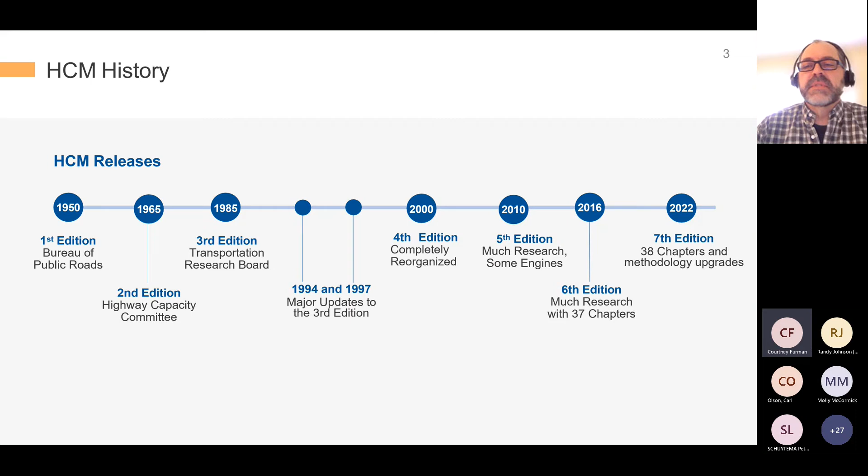Just a note on the timeline, the 2010 edition was the big implementation of multimodal level of service or quality of service metrics. With the seventh edition, you'll see today a number of new updates, including a new chapter on network analysis. A little background: all of these updated HCMs have a large number of research projects that feed the development of the technical material, as you'll see in our slides today.

One is based on pedestrians, also of course the CAV, FHWA pooled fund study, heavily led by Oregon DOT, and you'll see Peter's presentation that also addresses that after mine. There's some updates to the two-lane method, as well as the new network analysis, chapter 38, and of course various updates throughout.

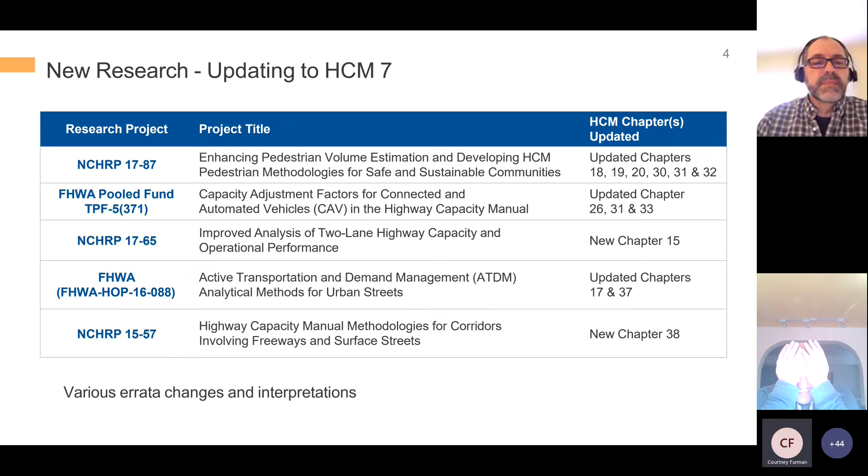So just some updates on pedestrians. We always, as a committee, like to use a time like this to remind people that the Highway Capacity Manual has a lot of non-highway modes included in it, including bicycles and pedestrians. There's been many ways to analyze and develop metrics for non-motorized modes, and it continues to get better over time.

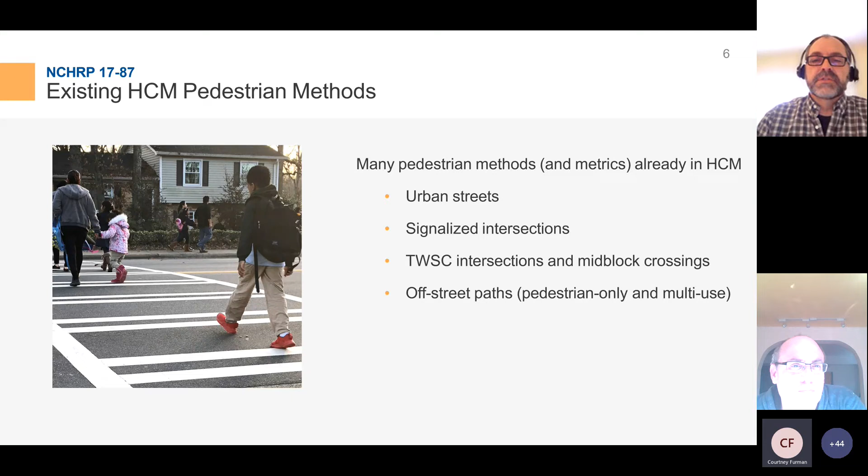Urban streets, signalized intersections, two-way stops and mid-block crossings, and off-street paths, for instance, are existing methods for doing pedestrian analyses. The next series of slides will have the sixth edition on the left, with the new HCM seventh edition modifications on the right.

For uncontrolled crossings, two-way stops, and mid-block crossings, there's been some modifications in terms of level of service being based more on a percentage of dissatisfied or satisfied pedestrians, and being more sensitive to a variety of parameters, including an updated set of motorist yielding rate tables that are very informative and interesting to look at. So with different pedestrian treatments, what type of motorist yielding rate you could expect based on that—that's a very useful table to draw upon as you're looking at project implementations and alternatives.

Delay is still calculated and sensitive to design pedestrian speed, and I'm going to minimize this so you guys don't see the time. Sorry.

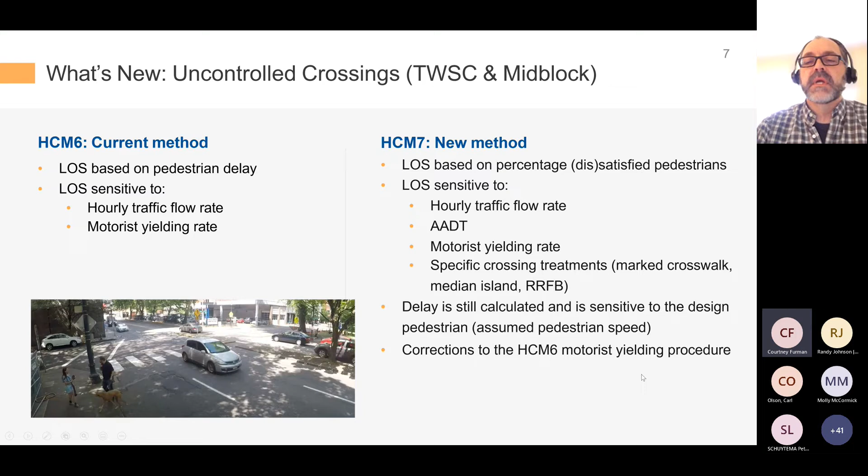If we look at signalized intersections, we've been able to do a variety of metrics for pedestrians over time, including delays and other density-based calculations, circulation areas, and so forth.

But that's been expanded with the HCM 7th edition. There's definitely more there, including talking about the all-ped Barnes dance, or ped scramble, and a variety of other crossing alternatives that you'll see there.

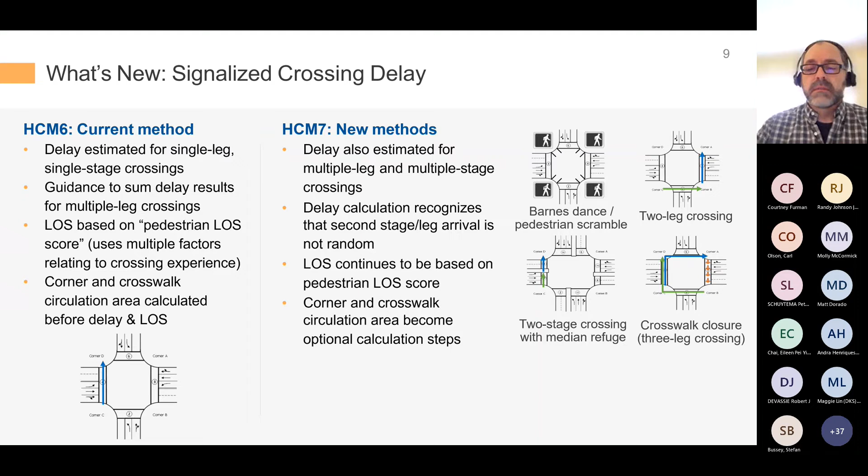The flow of the way the steps are listed out now breaks apart the delay-based versus the corner and crosswalk circulation-based calculations, because it was kind of misleading before—it made it seem like you had to do the corner and crosswalk circulation areas in order to get to the further steps that included the delay or the multimodal quality of service calculations, which is really what the level of service grade is based on. But now those are broken apart separately and are much more clear in terms of how you might want to analyze pedestrians at signalized intersections.

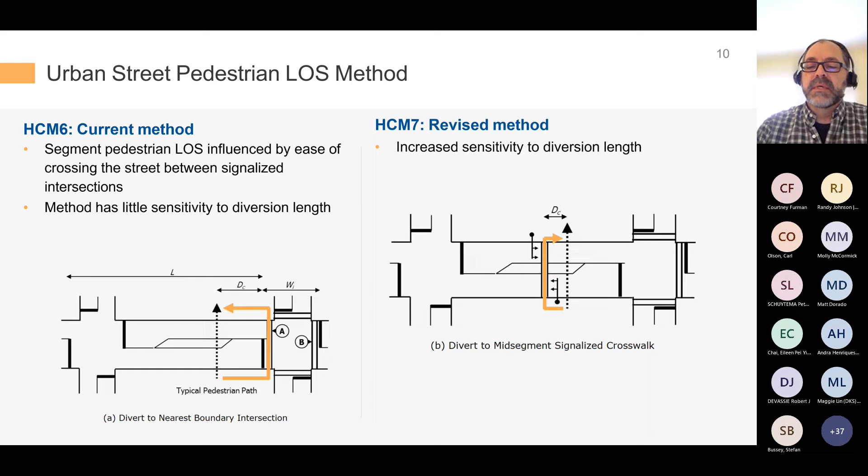When it comes to pedestrians along urban street corridors, the revised method is more sensitive to diversion. Previously it didn't quite account as sensitively to the fact that people really don't like to have to walk half a block to a signal and then cross and then walk back, and hence why we see people crossing mid-block even when there's not a striped crosswalk to do so. There's some increased sensitivity to that, so the method is improved in that matter as well.

So just keep that in mind.

New methods for PEDs have always been there for quite a while, as well as bike methods—a lot in the Highway Capacity Manual, not related to the word highways in quotes.

In terms of connected and automated vehicles, I know Brian at ODOT, who's also a committee member and subcommittee chair, Brian Dunn, and others, of course, were in these places from the public agency perspective of all this talk about CAVs and having these long range planning projects where they would need to start making some type of accounting for how CAVs might change the actual operations from a planning perspective, at least.

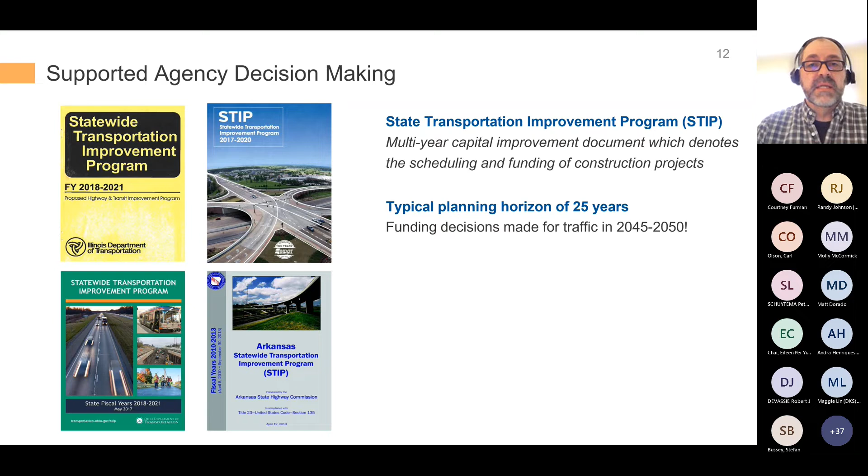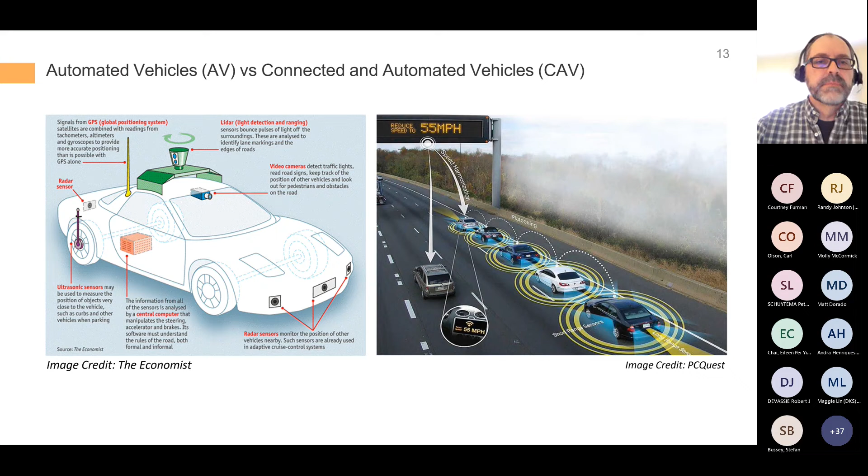This led to CAV methodologies and procedures being introduced into Chapter 26, the freeway facility supplemental chapter, and then chapters 31 and 33 for signals and roundabouts. For the HCM, if you haven't looked in a while, there are supplemental chapters available in electronic form online—that's where a lot of the details go. There were page limitations for the actual publication of the HCM imposed a while back, so the answer to that is a very robust appendix, if you will, of supplemental detail chapters. That's where the CAV methodologies made their way into the 7th edition.

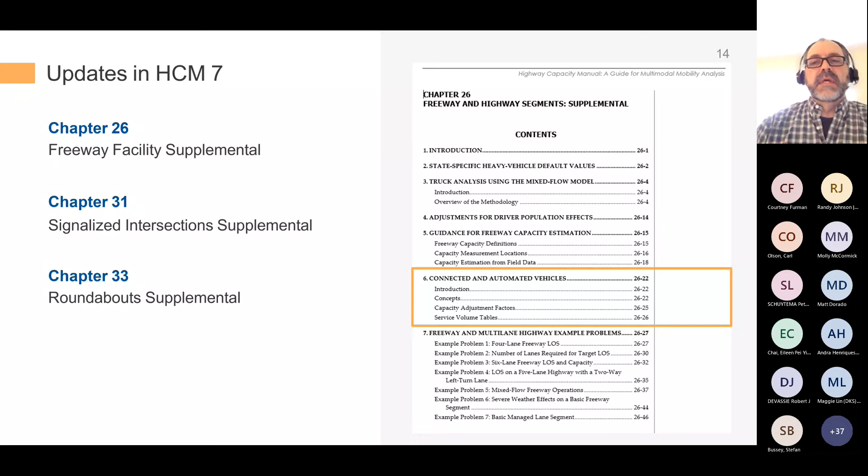All right, the other thing I'll say here is basically what you'll see in the next number of slides has to do with how CAV capacity adjustment factors or service volume tables were created as part of HCM 7 to help in those planning applications we described a little bit ago. One other interesting note is, traditionally in the Highway Capacity Manual, it's gather data, do research, develop methods based on observations and so forth.

But of course, with needing to be able to plan for various levels of penetration rates for CAVs, there's no data to go out and gather necessarily. So it's the first, I believe—you can almost quote me on that—where methods being brought into the HCM were developed not from data gathering, but purely from simulation environments. There was some major research done using microsimulation to evaluate CAV penetrations in different conditions, and from there, scale it back into a more deterministic planning level approach to make it available to the masses by way of the Highway Capacity Manual.

So that's the idea and basically the way in which it was approached, and what it really leads to is the ability to get CAV factors for all, if you will, without having to dive into the simulation environment.

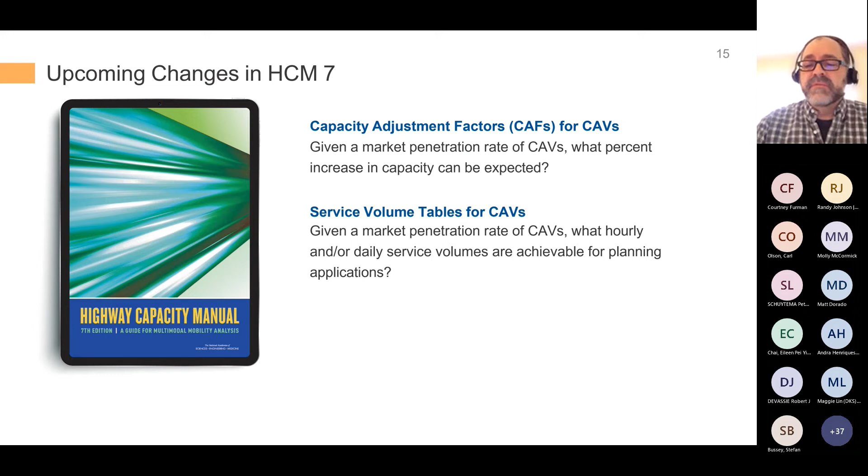And then also in terms of service volume tables—these are kind of your ability to basically get a sketch planning, quick and dirty lookup. There's a number of assumptions listed in all these tables, but it's a way to look up and say, hey, if I have a two-way volume of vehicles per day per lane, and I have a certain percentage of CAVs in my traffic stream in a certain area type with a certain type of terrain, then I can look up what my service volume would be, meaning I can go up to that volume and still have level of service E.

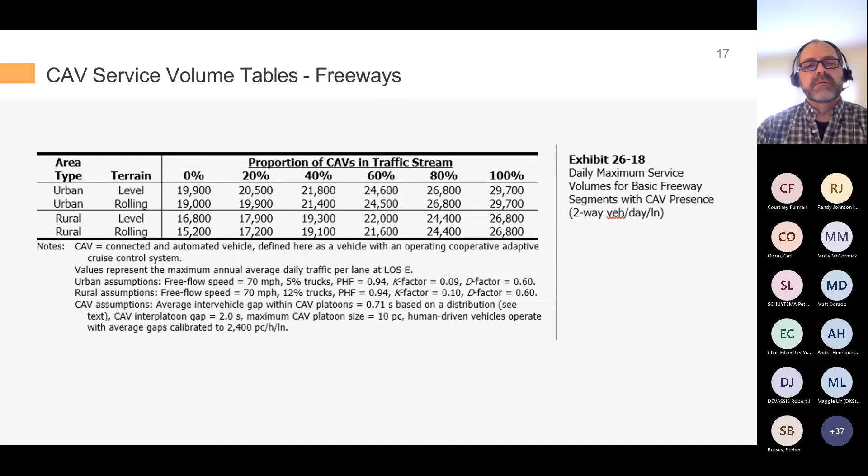So basically that's the general lookup table that was developed that complements what we saw a moment ago on actual adjustments to capacity. So we'll follow that similar structure when we go over into interrupted flow. That's what we look at in terms of signalized intersections.

There's some nuances and details there. If I remember right, the factor for lane width doesn't get applied anymore because as humans we're sensitive to lane width, but as it becomes more connected and automated, that goes away. We also have other tables with adjustment factors specifically for protected or permitted left turns. Now all of these are interpolatable, so if you have a 25% market penetration you want to analyze, you just do a good old fashioned interpolation of that table and run with the number you come up with. That's for signalized intersections.

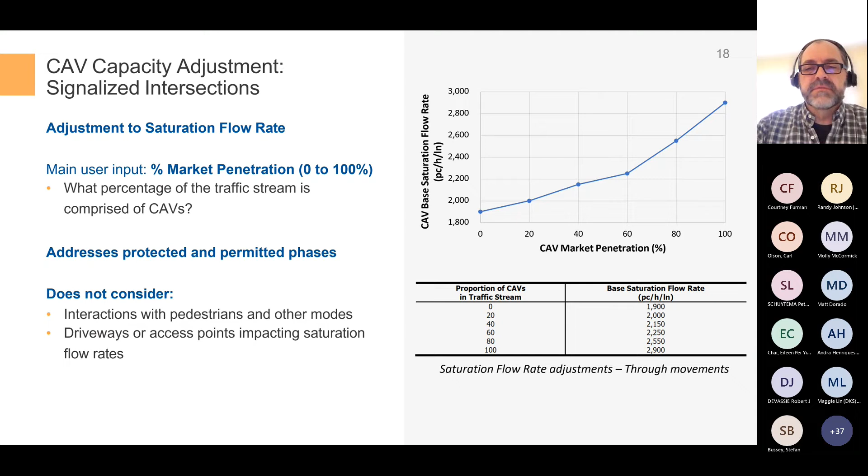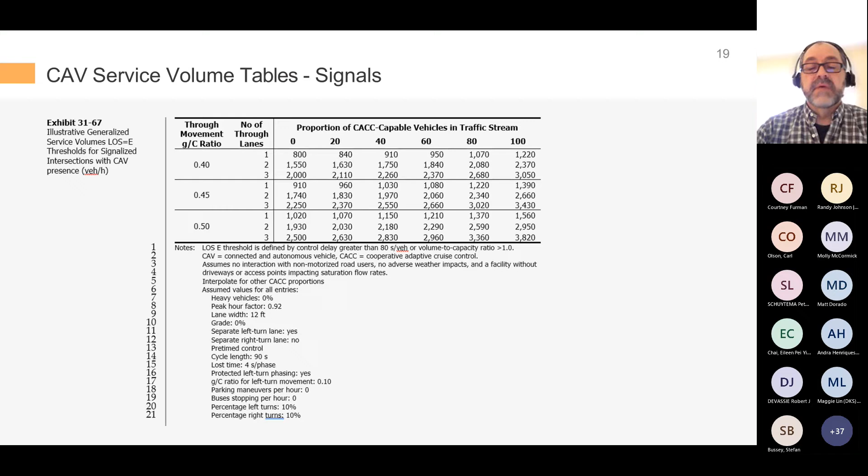As far as adjustments to the saturation flow rate, we have a similar service volume table. Again, with a whole host of assumptions, but with various G over C ratios and number of through lanes, and different proportions of CAVs, you can look up what your various levels of volume can be to still have level of service E from these service volume tables.

And then we move over to roundabouts. That's the other, the third area in which these CAV adjustment factors played out. It worked its way in again as an input of market penetration percentage, and then into a set of adjustment factors.

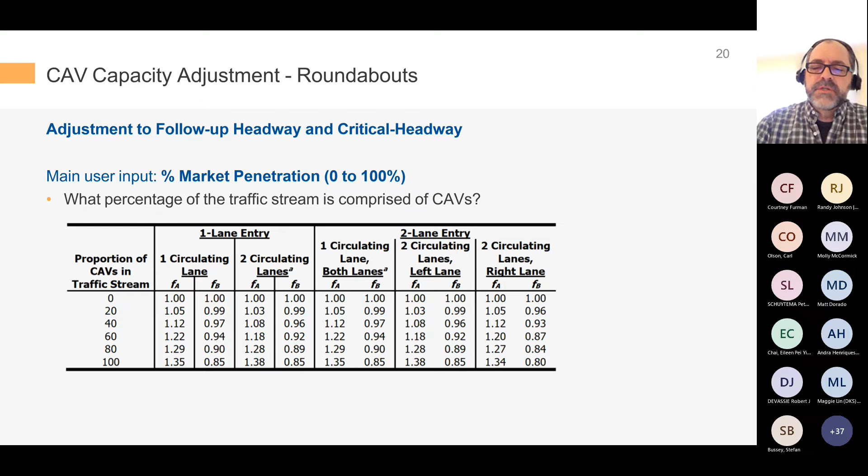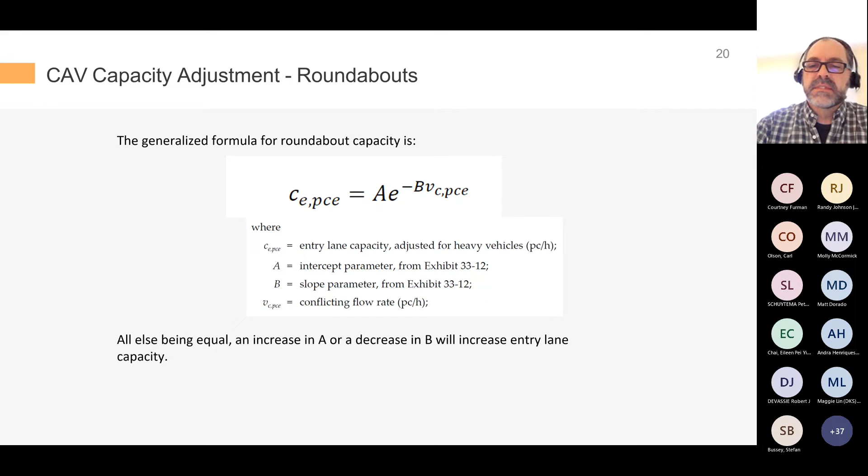Just as a refresher, in the 7th edition it's spelled out really nicely. If we look at a generalized formula for roundabout capacity, we see this equation with an A intercept parameter and a B slope parameter, and other things like conflicting flow rates. This is the base case with 0% CAVs, just what those A and B values are. Generally, if there's an increase in the A value or a decrease in the B value, that increases the entry lane capacity.

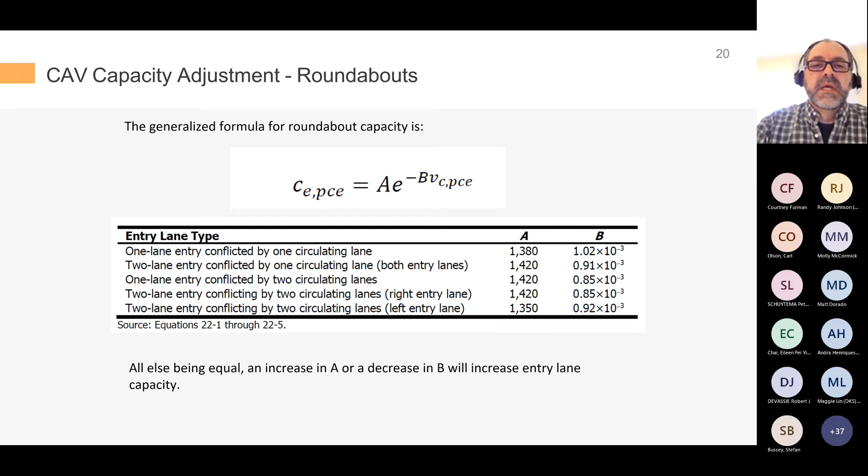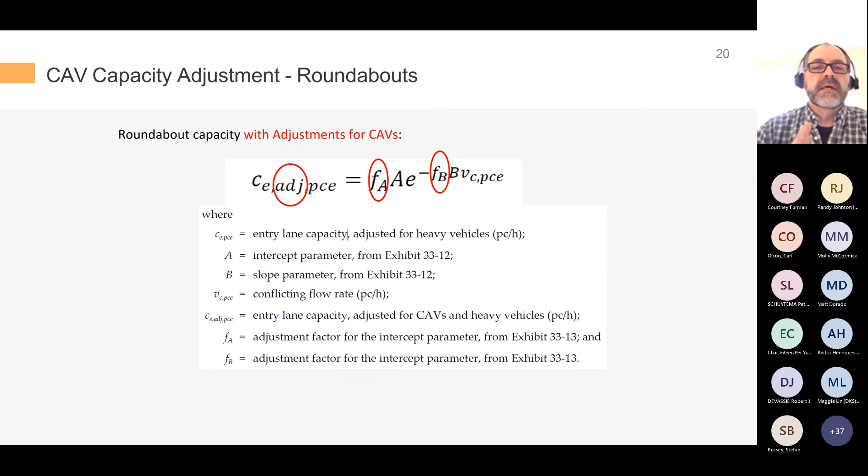With the inclusion of the CAV research, there's now the ability to calculate an adjusted capacity that includes factors for each of those—factors for the A intercept and for the B slope. From there you get the table we saw a few moments ago, but at least it provides a little more context.

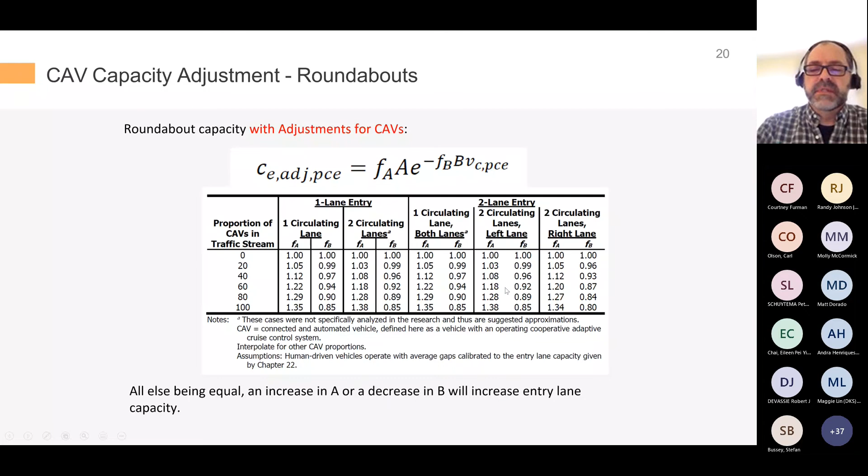So if you have your proportion of traffic that's CAV, say 20%, then depending on whether you have a single lane entry with one or two circulating lanes, or a dual lane entry with one or two circulating lanes, you can look up the respective adjustment factor to account for the effect of the CAV.

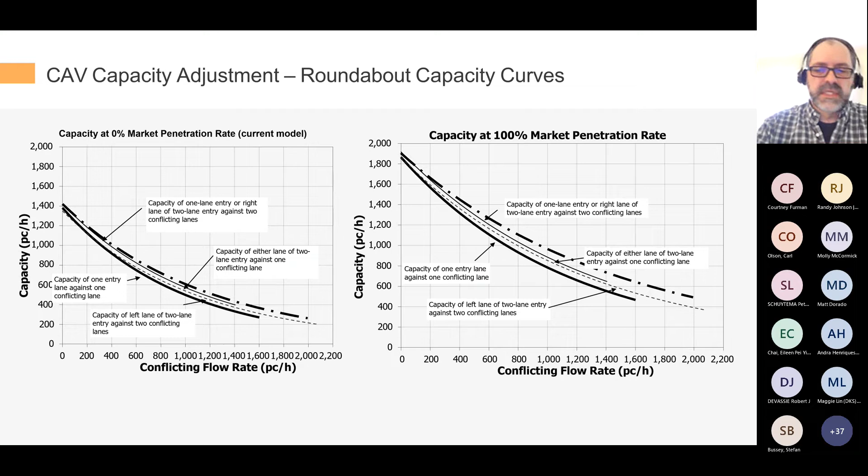All right, a lot of stuff to cover in a small amount of time, so I'm going a little fast, bear with me. I'm also, even after 30 years of doing this, getting dry mouth. There we go—not quite Miller time yet, so La Croix. Okay, I said I wasn't doing any product placements, Randy—stop me.

All right, any rate, chapter 15, updates to the 2-lane highway section. Again, we're going to look through HCM 6th edition and HCM 7th edition, and we're just going to do this quickly with some key bullet points.

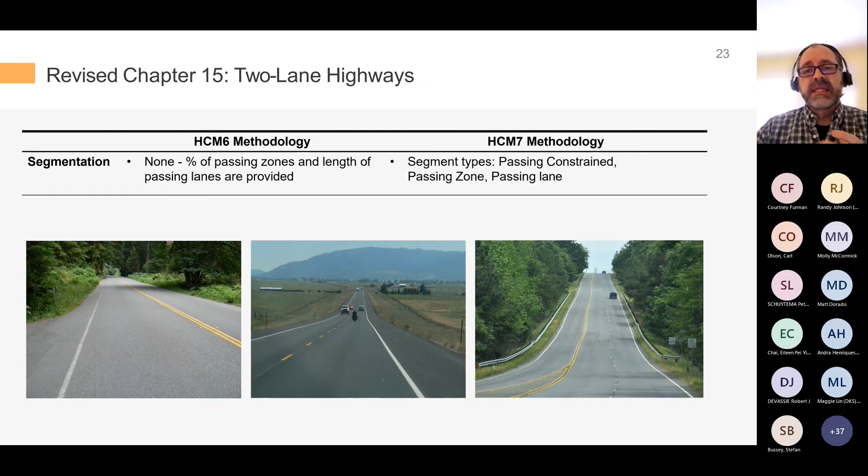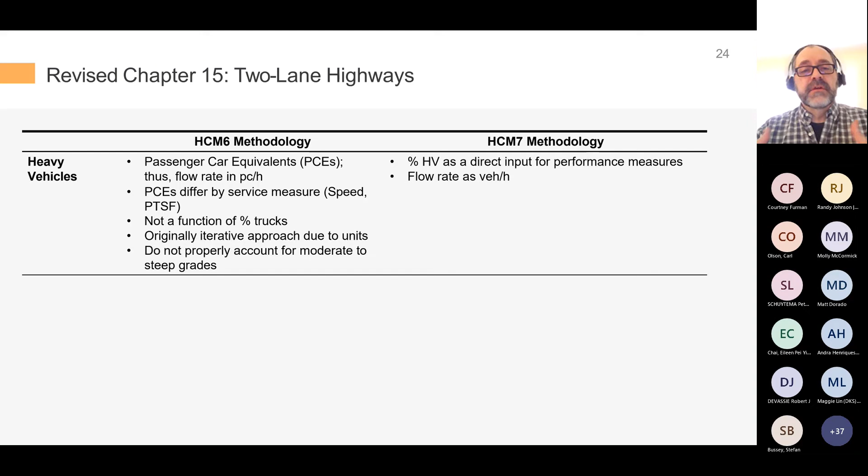With the 7th edition, it now includes segment types for passing constrained conditions, passing zones, or passing lanes. That's new, as well as directly inputting percentage of heavy vehicles, and entering your flow rates for this method, at least in vehicles per hour.

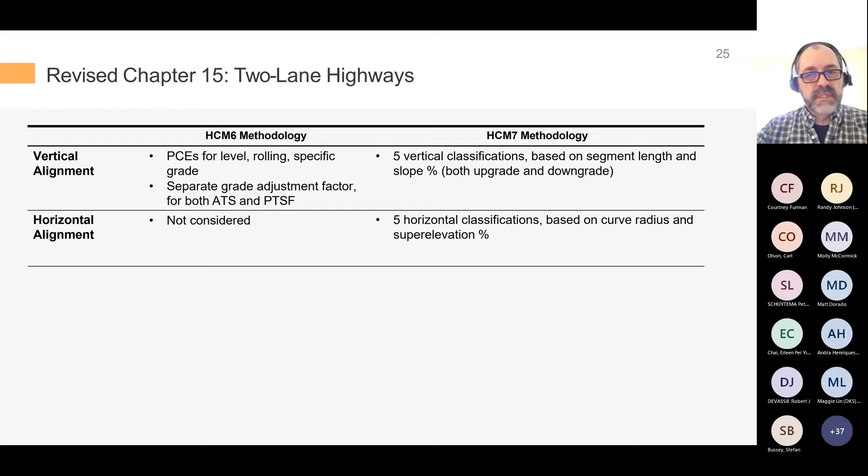In terms of accounting for vertical and horizontal alignments, there are now 5 classifications for both. For the vertical case, they can be based on segment length and slope percentage for both upgrade and downgrade. For horizontal, it's more based on curve radius and super elevation percentages. So those are modified or new components now built into the 2-lane methodology.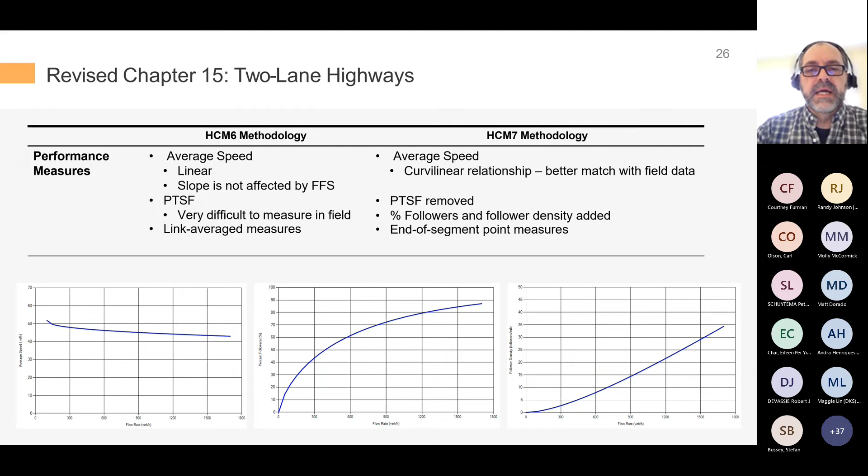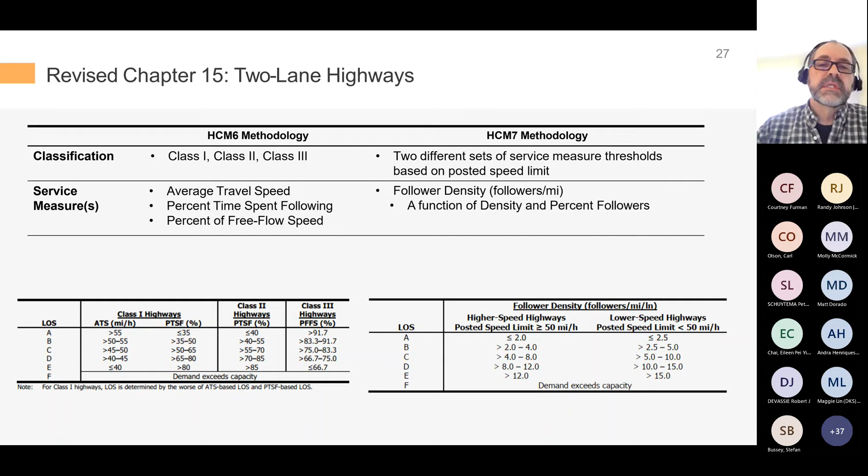We now have percent followers and follower density instead for the 2-lane highway method. So some modifications on that, and on how things are classified and what the service measure is. The service measure is follower density, or followers per mile, rather than average travel speed and time spent following. That leads to these modified tables that you see below, with the new HCM 7th edition on the right side.

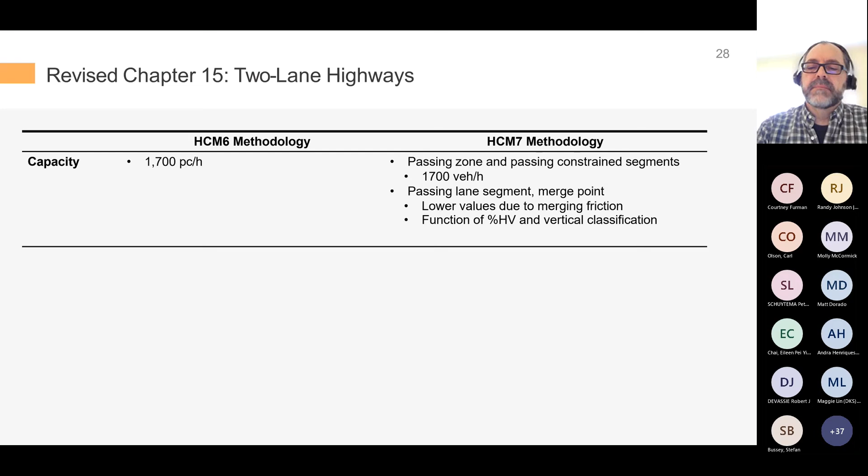I think there's just 1 or 2 more slides on the 2-lane highway, in terms of the capacity value being 1700 vehicles per hour rather than passenger cars per hour, and having these lower values for merging friction included as part of the passing lane segment.

Base free flow speed can still be estimated based on the posted speed limit, and there's an additional facility scope where you can have a length weighted aggregation of segment follower density values to be able to analyze a full facility in this 2-lane highway method.

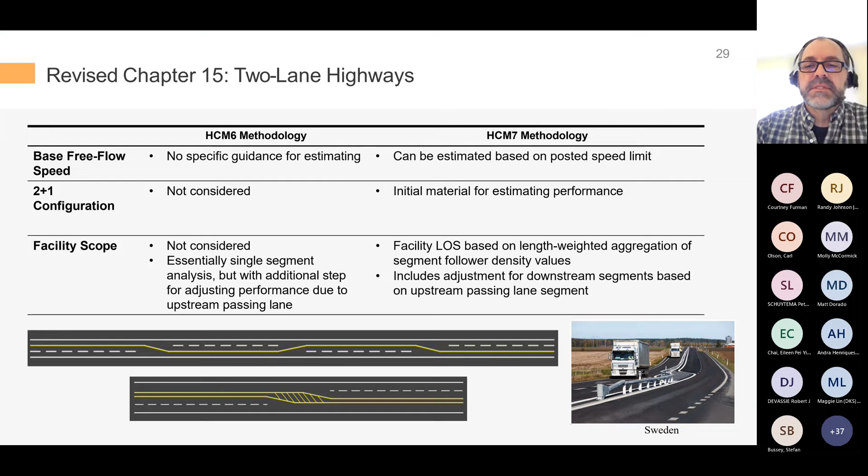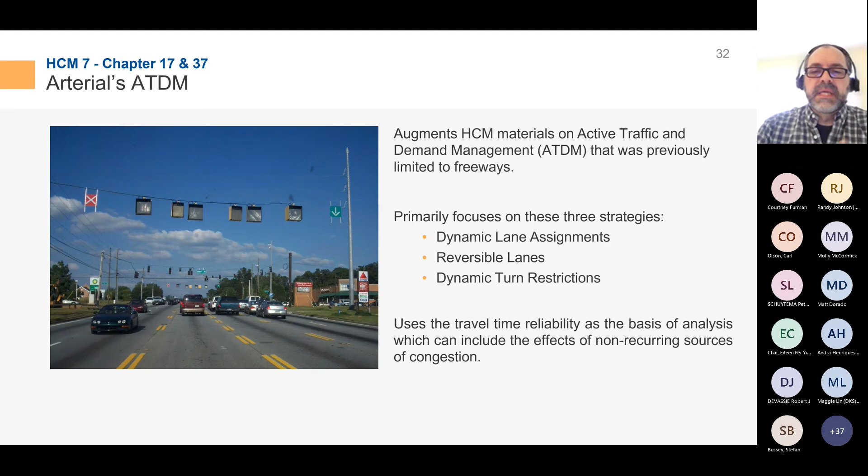A couple slides on an arterial method, active traffic and demand management. A while ago the HCM brought in some reliability analysis chapters, and here now from an arterial perspective, being able to focus on dynamic lane assignments, reversible lanes, dynamic turn restrictions, basically using travel time reliability as the basis for the analysis, and including effects of non-recurring sources of congestion. There's a slide showing what that might look like for adding a reversible center lane.

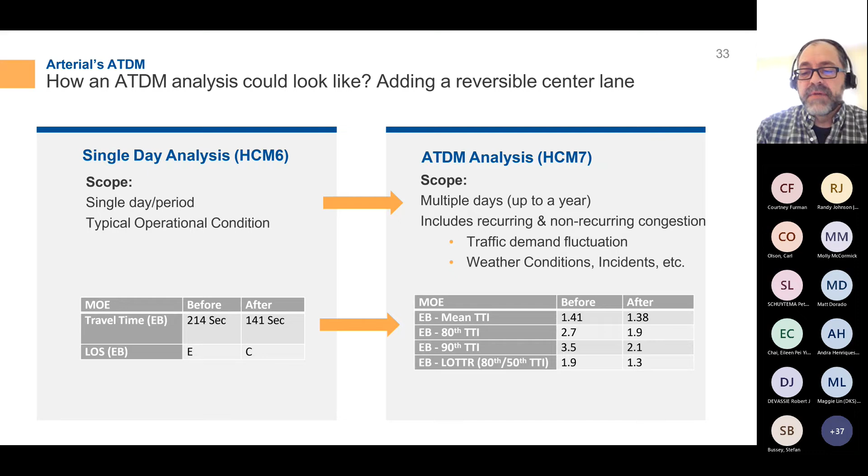In the 6th edition you had a single analysis, versus now in the 7th edition this ATDM analysis lets you look at multiple days and factors like traffic demand fluctuation, weather conditions, and incidents, seeing how those measures of effectiveness can change, and what you can get from a before and after study perspective using travel time indices from this method. That's something you might find interesting to look into implementing if you didn't know it was there in the HCM.

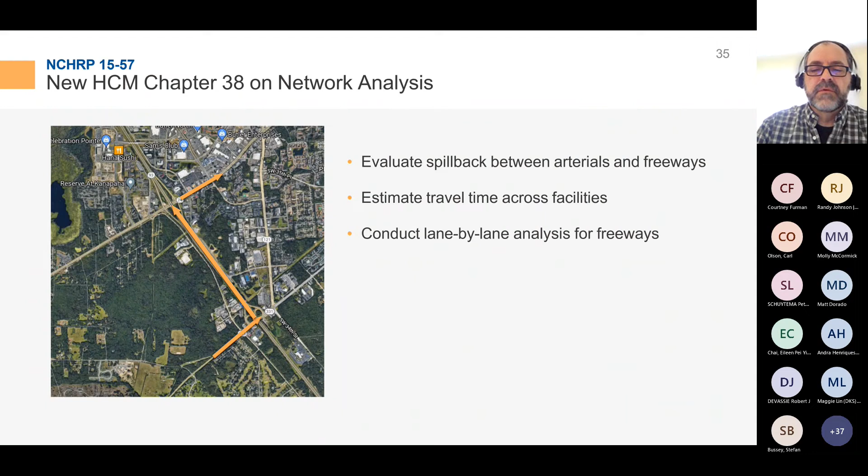Last but not least, there's big research on this new network method, which culminated in a new chapter in HCM 7, chapter 38 on network analysis, with key points here to evaluate spillback between arterials and freeways, travel time across facilities, and to conduct lane by lane analysis for freeways.

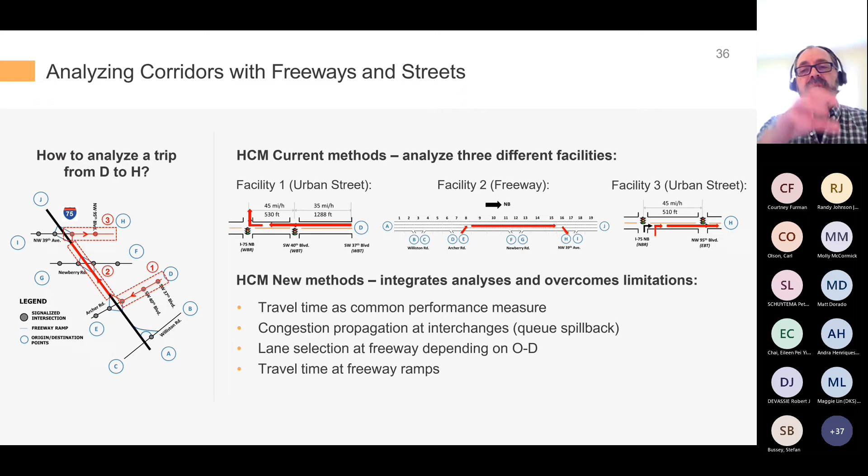I'm getting close to the end of my time, and really the bulk of the presentation is almost done. What I want to highlight here is that in the 6th edition and before, it was really facility by facility analysis: urban street, freeway, urban street again. With this new method, it integrates those analyses. I recommend you look into chapter 38 as well, and the underlying NCHRP study that was presented earlier.

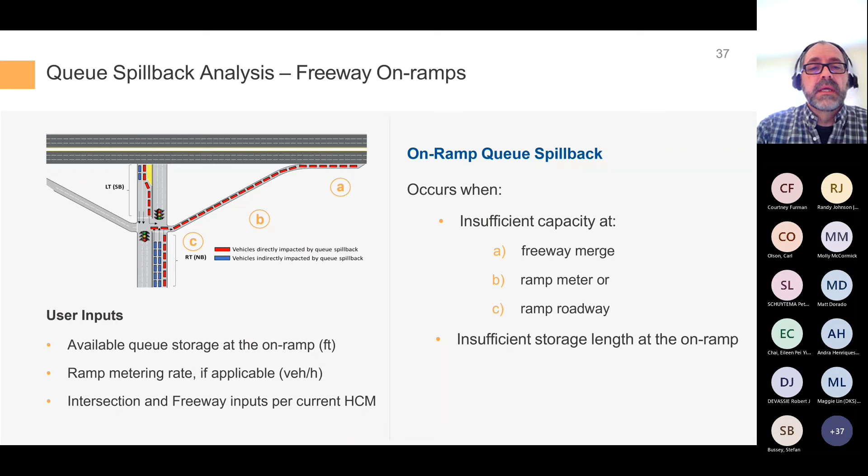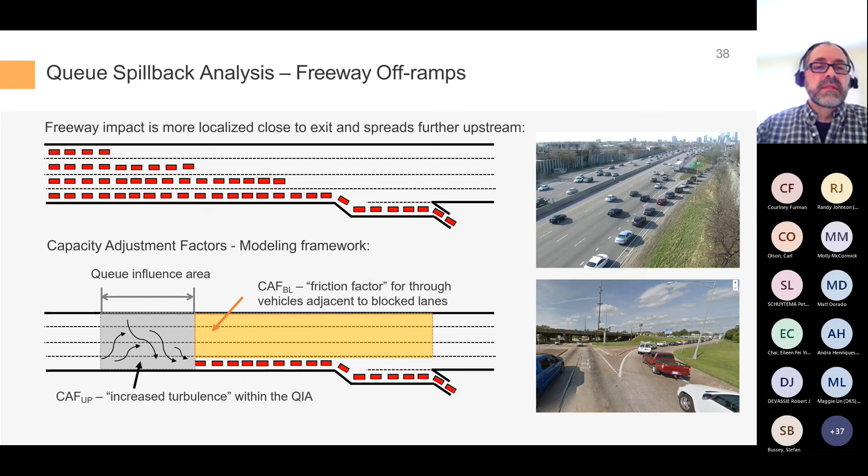It helps to look at the next couple slides for a summary. This brings in a lot on queue spillback, looking at points where there could be insufficient capacity because of ramp metering, freeway merge points, or insufficient storage length. More from this deterministic perspective, looking at different ways freeways are impacted based on spillback onto the freeway, or the different queue influence areas being modeled as part of this process.

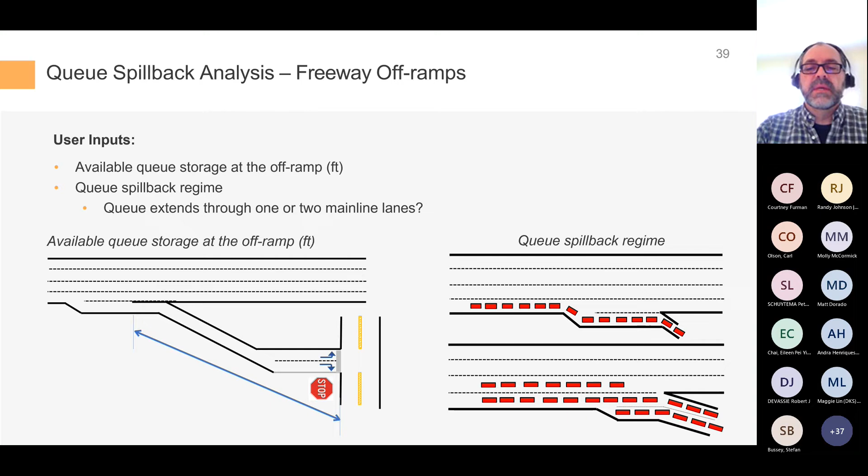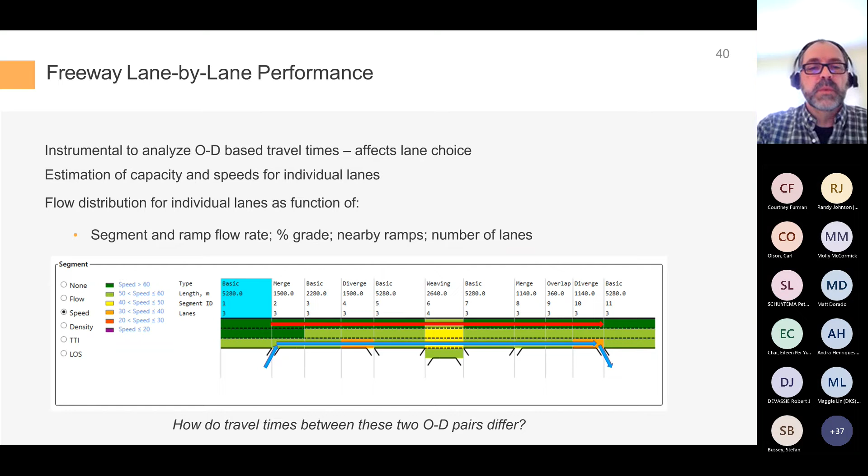User inputs include queue storage at the off ramp, and what type of spillback regime it is: single lane off ramp, dual lane off ramp, what happens at the terminal, how that's controlled, and so forth. From there, some analytical methods, and there are software implementations of these as well, in order to look at lane by lane performance, and ultimately to compare the left versus the right.

Again, it's a segmented approach in the 6th edition, versus the new integrated approach in the 7th edition. In this case, looking at an OD from one arterial using the freeway, and then another arterial to the north.

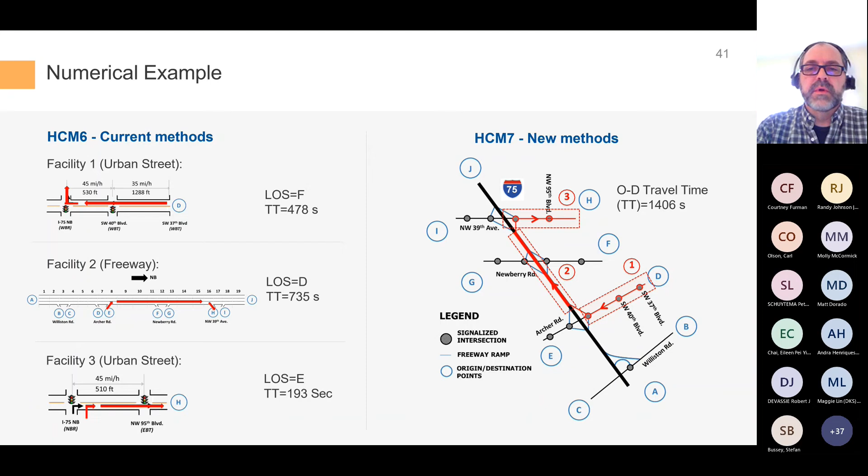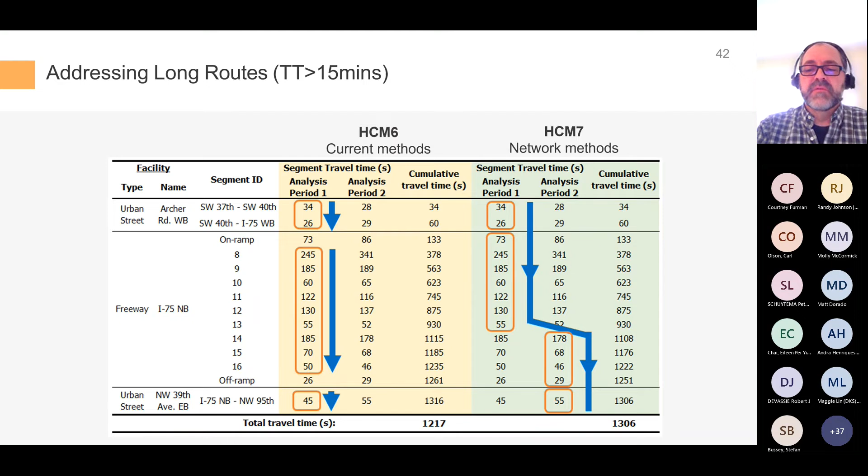Also, it accounts for this multiple period analysis, so travel times of greater than 15 minutes. You can see the 6th edition is more linear, just going straight down that single analysis period. In the new 7th edition, once you hit past the first analysis period, it shifts over into analysis period 2, giving you a more refined analysis of the network.

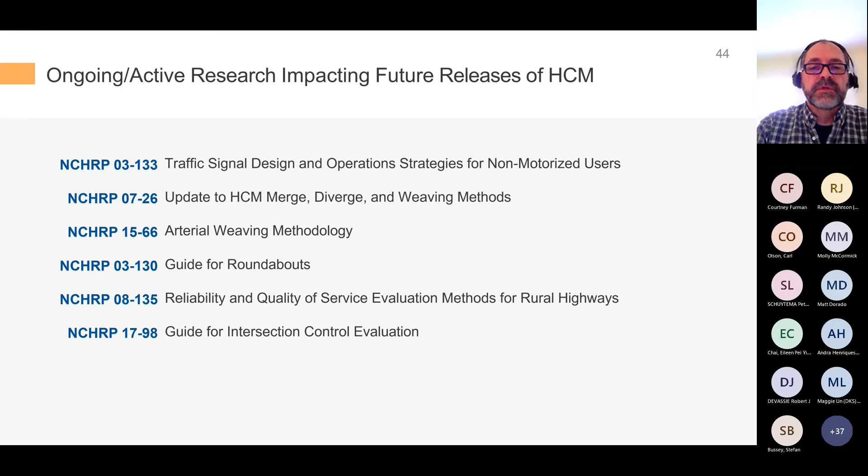All right, I know I'm running low on time. I'll just say we've got some really cool additional research coming, like arterial weaving, as well as some other updates for merge, diverge, weaving, and so forth that you see on your screen. Those will all be working their way into future editions.

I will say the 7th edition is available right now on TRB's website in digital form. I believe it is not yet out in physical form. I have not seen that, but keep your eyes open for that. The digital format is an EPUB version, so you can have it natively on a tablet. It's not just a PDF.

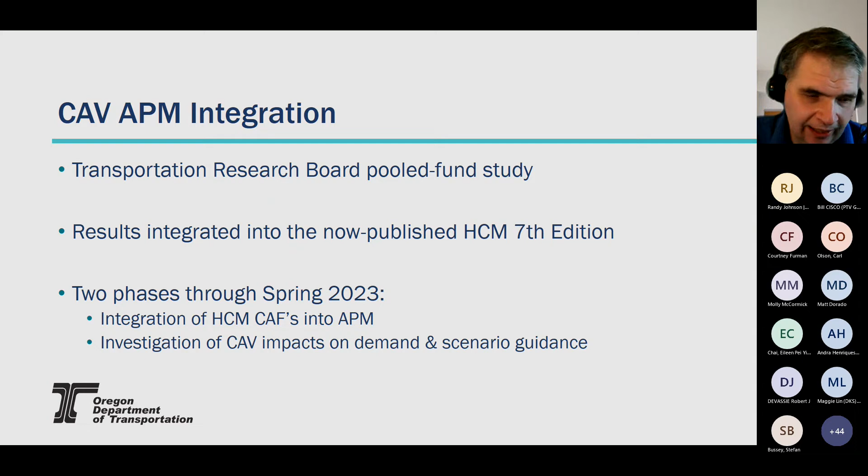As Bill mentioned in his presentation, this research and pooled fund study is generally based on these vehicles being connected and automated, so the vehicles can connect with each other and with the roadside infrastructure. There's allowance for cooperative movements, so they can do things like platooning. These are consistent with the Society of Automotive Engineers level 4 and 5, meaning these vehicles are completely self-driving without human intervention in certain or all circumstances. This means things like CAV-only lanes or CAV-only facilities, for instance.

Keep in mind that those level 5s don't require a driver, as in today's parlance. So you could throw a whole bunch of 6-year-olds into the vehicle for a birthday party—you don't need a licensed driver with the level 5s.

Today, most new cars, almost all new cars nowadays, are sold with some manner of connected technology, with cell phones and hotspots. A lot of these base automated vehicle features are now available: adaptive cruise control, lane keeping, or some limited self-driving. So you can buy anything from L0 all the way up to level 3 vehicles today.

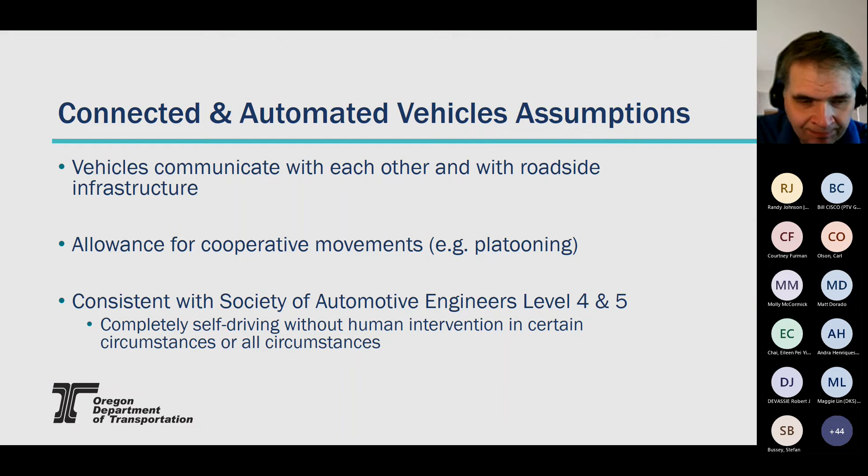However, one of the only things that's really certain about CAVs is that it's relatively uncertain. There are large amounts of many outstanding issues, such as what to do with the vehicle codes, ownership, insurance, roadway design, to name only a few.

There really are no level 4, level 5 vehicles existing commercially for personal use. You can't go out to your neighborhood car dealer and buy one. As Bill mentioned before, everything the pooled fund study had to be based on simulation, agent-based simulation, using variable different levels of these CAVs within an assumed mixed traffic stream. So again, there's no real life information that can be directly pulled on this today.

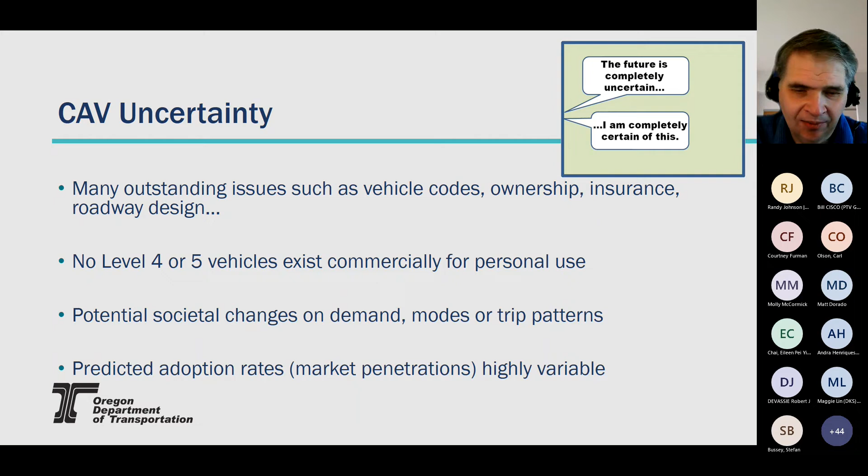There's a lot of uncertainty related to potential societal changes. What are these going to do to actual demand, actual modes, actual trips? There's some unknowns there. And then, of course, the predicted adoption rates - these market penetrations are really highly, highly variable.

As an example, here's a document, a figure I just pulled out of the pooled fund study. This illustrates some different adoption rates. You can see from high to different levels of disruption. For example, you could say, well, maybe that high disruption is the result of some mandatory regulations or requirements. Maybe it's mixed in or commingled with EV adoptions or GHG reductions, as an example. That might cause that high spike.

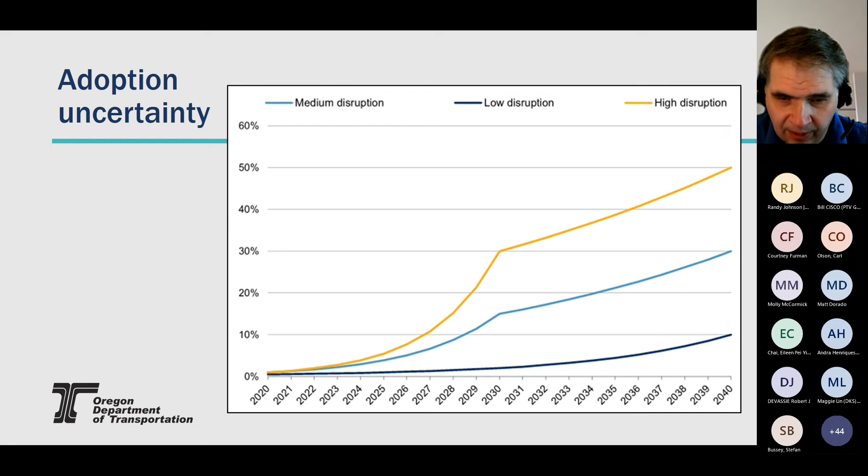The low, for instance, could be saying we're not going to do anything - we'll let the market do whatever it wants, and people just adopt these over time. That could be relatively a status quo kind of thing, or a medium kind of disruption, maybe a combination of these two, maybe with some incentives. You can see that 20 years from now, you could have a substantial portion of vehicles being connected automated vehicles, or you could have relatively very little. But it's really going to be dependent - we really don't know where we're going to be.

So with that, we're really going to need to use a range of realistic market penetration rates. It's not necessarily because of all this uncertainty with these MPRs and all the other issues mentioned and more - it's really going to be incorrect to rely on a single capacity value, saying this is the capacity, here's my number.

If we're really going to have to end up using a range of scenarios, that's going to result in a bookend range of varying capacities. And while the HCM does show the MPR levels, as you saw from Bill's presentation with the different tables, it really doesn't necessarily give guidance on what to use when. So the important piece of the APM work was to have guidance on how and when to choose these market penetration rates and developing these particular test scenarios.

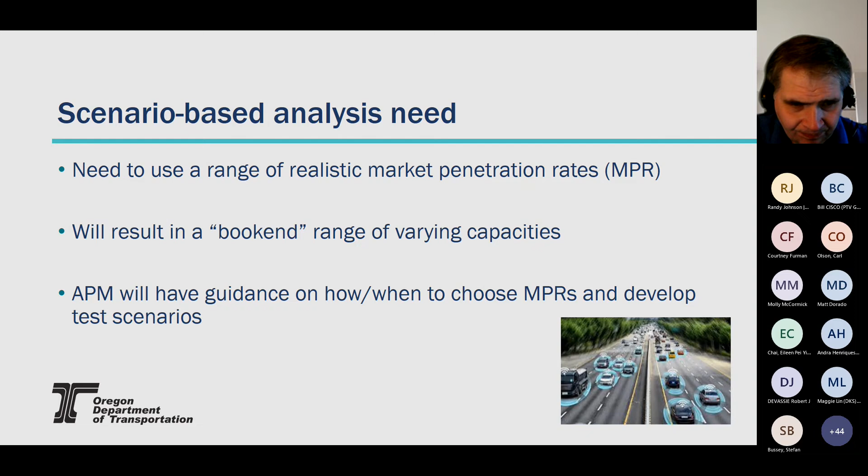This update will hit multiple APM chapters. For this first phase, a lot of the bulk of the work will show up in a new appendix for chapter 6, in the future year forecasting - this will have the definitions, assumptions, and generally the basic market penetration rate and scenario guidance. Chapters 11 through 13 - these will be where these capacity adjustment factors sit and their related guidance, for those specific facility and analysis types.

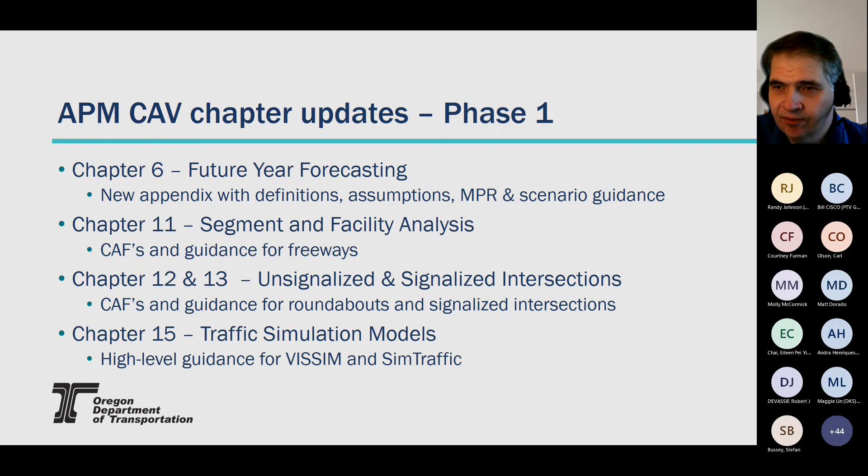We also will have some mention there for CAVs in chapter 15 with the traffic simulation - some high level guidance on how to better simulate CAVs for VISSIM and SimTraffic. Phase 1 also includes development of 5 case study examples, which will be integrated throughout these chapters. There are also going to be training developed as part of this phase, and we'll present this at future APM user group meetings.

Phase 2 is the contingent phase. Again, we're looking at probably some changes to chapter 7, which is our system planning - here we'll have some guidance for CAV scenarios and transportation planning, and these higher level analysis models that we have. Then chapter 17 will be talking about more guidance on modeling the CAVs and demand effects into the travel demand models. Phase 2 also includes some written final reports and things, and documentation as well.

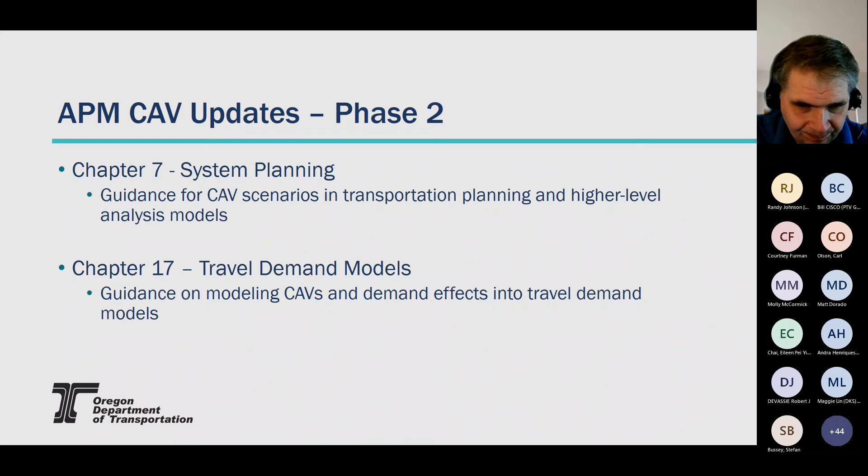So where are we with this? We're starting it right now. This is working its way through the ODOT contracting process. Hopefully we'll kick off this spring, in the next couple months.

Right now, it's really going to be between TPAU staff and some region staff. However, we would like to have a mix of reviewers, people that are interested in this. So this is an opportunity to be involved on the technical advisory committee that'll be set up for this.

We'll be looking at the chapter updates in bundles, and each bundle will have a meeting that goes along with it. There's also development of case study reviews with related meetings, development of at least a couple sets of different training materials. And if we do the phase 2 work, up to potentially 4 different white papers and documents, with related meetings.

So this is something that could be 40, 50, 60 hours or so, depending on meeting times and review time. If you're interested in CAVs and like to be a part of it, please send me an email. My contact information will be at the end of the presentation. We can't have everyone who's interested — we get a lot of folks — but I do want to be able to get a broad swath of reviewer involvement.

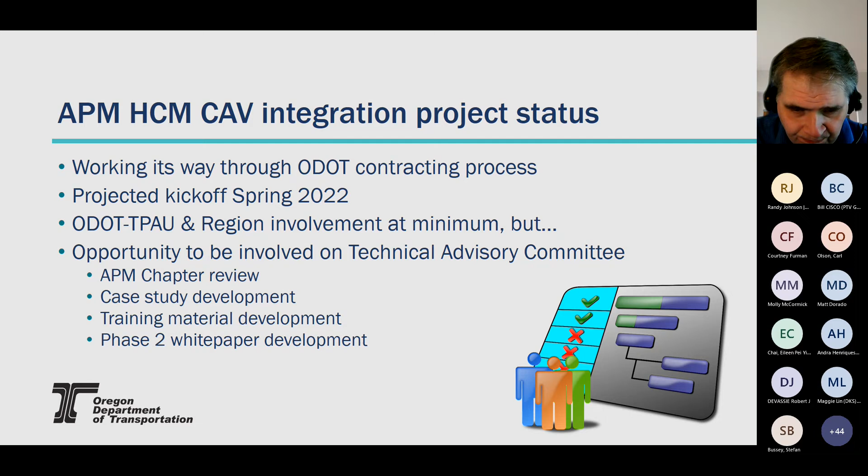So I'm just going to talk a little bit here on the HCM 7 adoption. We don't necessarily have any formal process for the HCM at ODOT. So it's more about it being available. It's really going to be dependent on the scope of work language and contracts being written. As you know, it's not really a good idea to change methodologies right in the middle of a project.

So I wouldn't do this in the middle of any active projects, but for future projects coming up, it's important to change that boilerplate scope language, contract language into HCM 7 instead of HCM 6. Have it documented in the methodology memorandums, say we're going to be doing the HCM 7 processes instead, and get the local ODOT planners and project leaders to sign off on that.

And then also, of course, available tools — that's one of the things right now. We have HCS 2022 out now, replacing HCS 7. Synchro, Sidra — those updates are still yet to be released or announced.

And there's potentially, for the CAVs, the capacity adjustment factors — those factors were existing in HCM 6. So there's some ability, for instance, to take the HCM 7 text and then modify some of the CAFs in places in some of these present software tools.

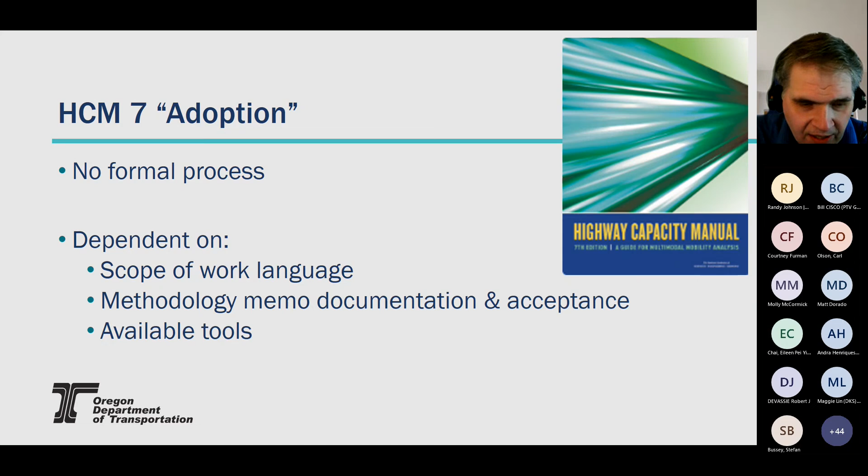Some other APM updates in progress: we're going to be working on updating our Chapter 1, the ODOT information section. We've had over the last couple of months a number of mini reorganizations, unit consolidations, groups and some things shifting around, so we're updating that to match our current structure.

Chapter 2, there's the scoping tool sets in there being updated, getting rid of some of the obsolete ones and adding some of the new methodologies. And then Chapter 3, a lot of this is going to be updating to the new count system guidance.

This is getting away from the old traffic count management program into a new MS2 cloud-based software. We're updating all of the appendices, everything relating to how you use the proper reporting functions, getting outputs for counts and the like. So all of that will be redone.

And then Chapter 6, in the future volumes, we're updating our latent demand section to include induced demand, and I'll have a couple slides on that after this next slide that I do want to hit on.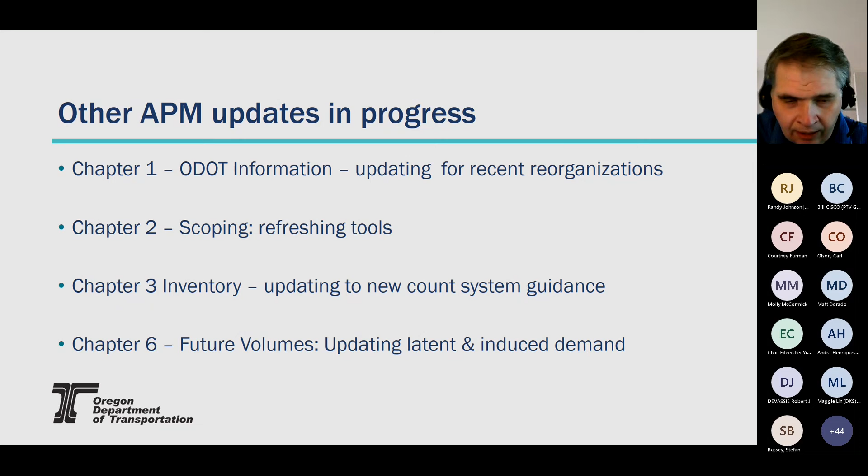And then other APM updates in progress: augmenting the DTA section and the mesoscopic section in Chapter 8, because DTA is becoming a bit more prevalent now, especially in the Portland metro area. Hopefully we'll add some more exhibits and examples to that, make it a bit more user-friendly.

And then for Chapter 15, we're trying to get time to restart the work on updating and integrating the Vissim protocol into Chapter 15.

So this will be integrated as a separate document, integrated within the chapter, and apply to all simulation tools as examples. So the calibration requirements would apply to SimTraffic, for instance, because the new version of SimTraffic needs just as much calibration as Vissim does.

And then we're also working on rebuilding the guidance for the environmental traffic data—rebuilding it for noise, streamlining that procedure, creating air quality traffic data guidance, and adding in a GHG guidance as well.

And then lastly, working on Chapter 19, the documentation chapter. This was the chapter that was still in version 1 language, so here we're updating it for general current practice. A lot of it's going to be bringing in some stuff from Chapter 2, like the methodology memorandums and things like that, which we brought into Chapter 19 as it's a bit better place.

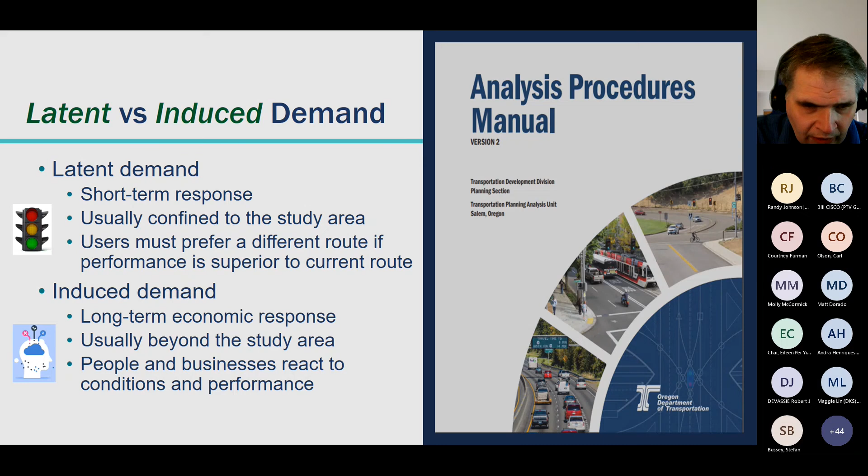And then lastly, this is important: these induced demand calculators have gotten a lot more press as of late, as the State of California has now adopted a VMT standard, replacing LOS for their mobility and, I believe, also for their development review. The important thing, because of Oregon's land use laws, is that while these things are relatively simple, these calculators are inaccurate for use in Oregon. They're generally based on, as you may have seen, the UC Davis method.